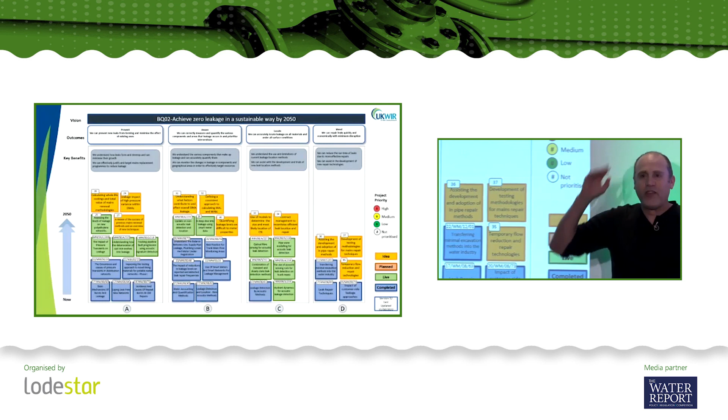So, number one is a very, very simple change. I'm just going to wander over here. Previously, all of these had a little number on them - you can see the top ones here, 36, 37 and such like - and you always said, what on earth do those numbers mean? It was just simply a placeholder number. What I've now done is put the report numbers down, so as soon as the report is published, it's there. It just makes it easier for everybody to find.

But the massive great big change that some of you are going, I can't believe you've done that, is that we have changed all of the outcomes going across the top. Everything is now badged under PALM - Prevent, Aware, Locate, and Mend. We coined that phrase about 5 or 6 years ago at this very conference, we started talking about PALM. PALM is now a way that the whole industry reflects upon managing leakage, and so what we've done is taken the route map and aligned it into that.

So everything falls under those categories, and it makes it a lot easier when we work our way through.

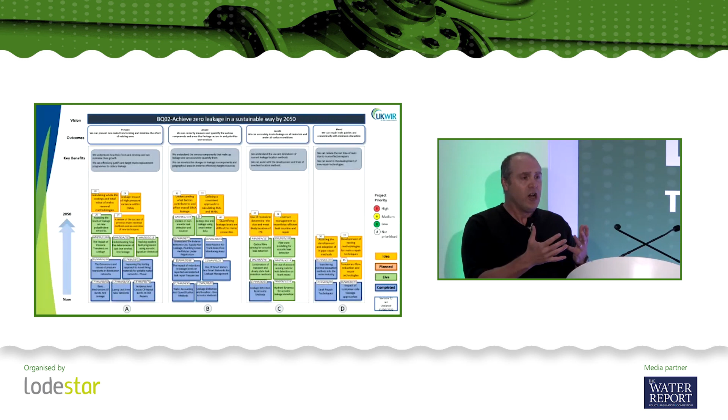The other great bit is I've made sure that all of the projects are on there. Previously, some of the projects were kind of put together, but I've made sure each project now is badged separately. For the first time, I can show how many projects we've done - there are 15 blue projects in there. That is a testament to you lot.

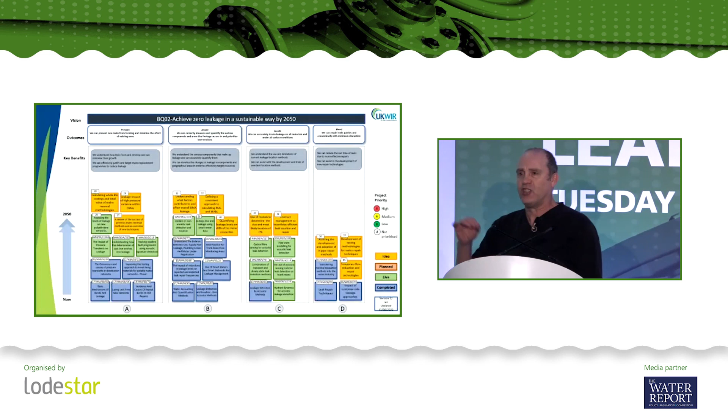Particularly to all of you in the water companies who are providing staff to sit on program steering groups and managing those projects, making sure the results reflect what we're looking at in the water industry. So I'd like to say thank you to every water company that is providing members of staff to sit on those program steering groups. It's extremely important.

We have done more projects than any other big question. When I showed this recently in front of all of the other program leads, they actually did do a gasp as well, because they were looking at our program and going, my word, you have done so much.

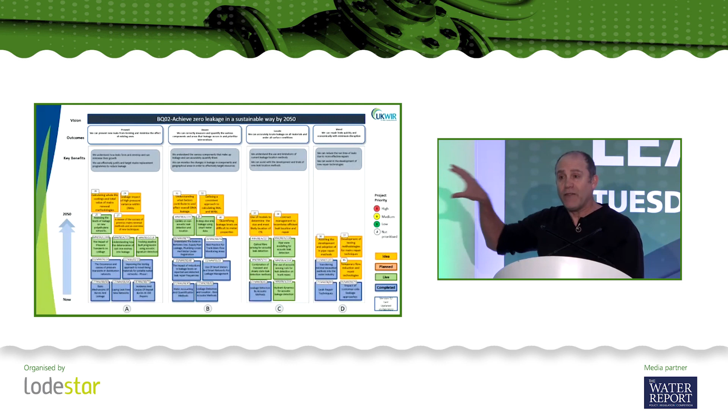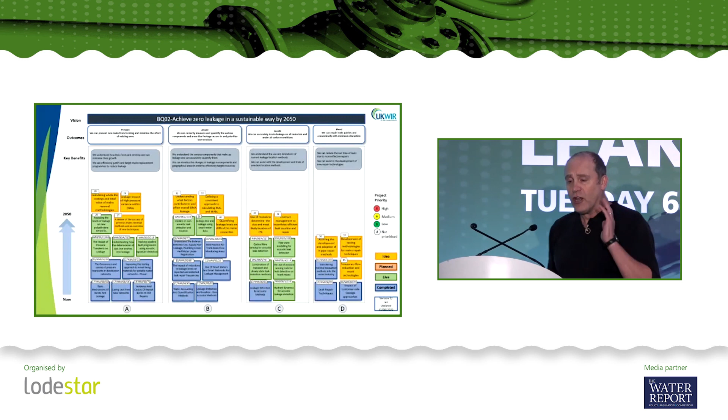But not only have we done so much, we are doing so much. We have 11 live projects running at the moment. A number of those are fundamental research with universities, and we're going to be hearing from Jen from Southampton, who's managing a lot of those. So there's a lot of work going on as well. What I'm going to quickly do is just dive through the live projects that we've got going on so that people are aware of what we're doing, and we'll work our way through in order.

So let's start with the prevent side over there. We have been really focusing, and it's really great seeing so many people coming into this room now who are looking at preventing leaks occurring in the first place. It's about calm networks, it's about our mains replacement programs, about all of those things.

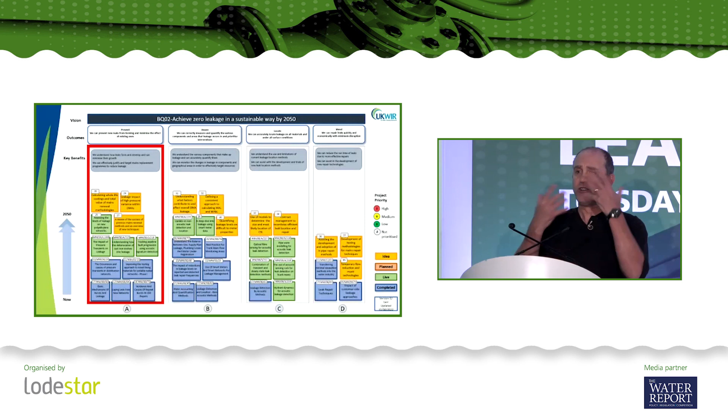So what we're looking at is we've got a couple of PhDs working at Sheffield University, looking at the impact of pressure transients. We did a great piece of work recently where effectively we looked at what causes pressure transients in our networks, able to demonstrate really well where those were coming from - 60% of our pressure transients were associated with pump changes, but 40% weren't. There's a large number of transients that aren't pumps going on and off in our network, caused by other reasons.

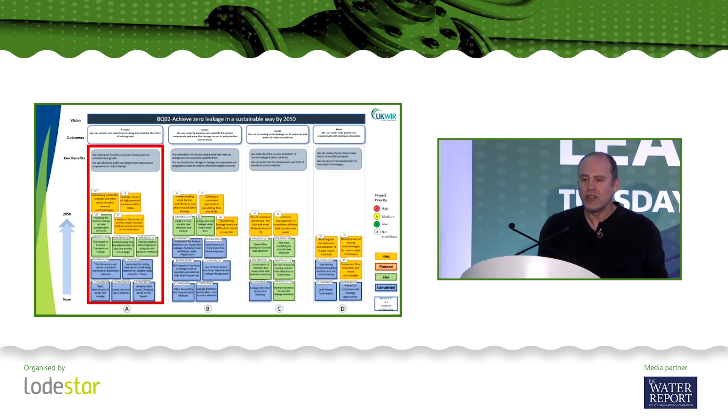Now what we're doing is taking that piece of work, handing that to a PhD and going, okay, what does that do to the pipes? What does it do when we've got the pipes flexing all the time with these pressure transients going on? And then a second piece of work there, looking at the deterioration of cast iron as well - looking at the stress risers that's causing and how, particularly with cast iron, that's affecting it and causing that long-term damage we're seeing, how leaks are growing. So that's going on at Sheffield at the moment, two great pieces of work there.

And then we got some ones from Southampton, tracking pipeline fault progression. I'm not going to talk about the Southampton ones because Jen is coming on video, so she's going to be talking about those bits.

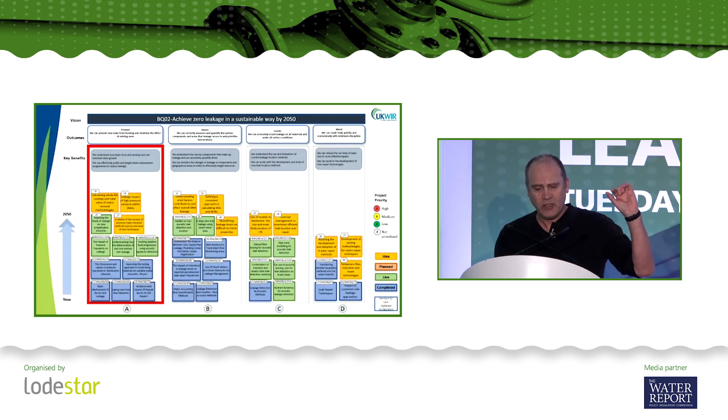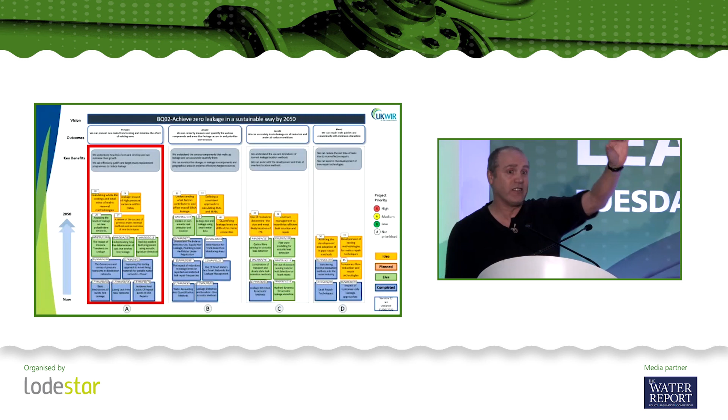So then we've got assessing levels of leakage on new polyethylene networks. Now we've already been talking about that today - in fact, I stuck a little post-it. I'm hoping everybody has written down some post-its, okay? Get your post-its up, put them up on the board there. But my one that I stuck up on there is, can we install new plastic pipe that doesn't leak?

I was in Germany about a month and a half ago, chatting with German water companies. And I asked them about leaks on new pipes, and they just went, what exactly do you mean? And it took some time to explain that I wanted to know how many times their new pipes leaked. And they basically had no understanding of that whatsoever because their pipes don't leak.

Ours do. We have good anecdotal evidence of that. John, I know you're in the room somewhere from Anglian Water, has really good evidence of that as well. What this study is doing is effectively going into brand new networks that are laid on brand new estates and saying, okay, let's assess the level of leakage on those new networks, because we need to understand the size of the problem. But this is one of those pieces of work that is a springboard, meaning the outputs from this will then start to drive changes.

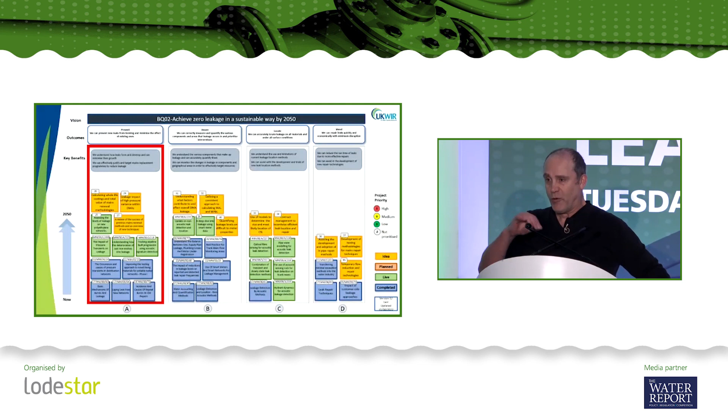Because we will need to make sure that our contractors, that all of our systems being laid on those new estates are laid correctly, but not just the new estates, every mains replacement as well. We can't be laying plastic that leaks. So that's a bit of springboard work we're doing at the moment. That's the prevent piece.

So pretty clear, I think, hopefully in terms of that side, but let's look at AWARE. Now, previously, when we talked about PALM, we thought of awareness as being which DMA are you going to go and work in today. I've expanded the scope of that a bit.

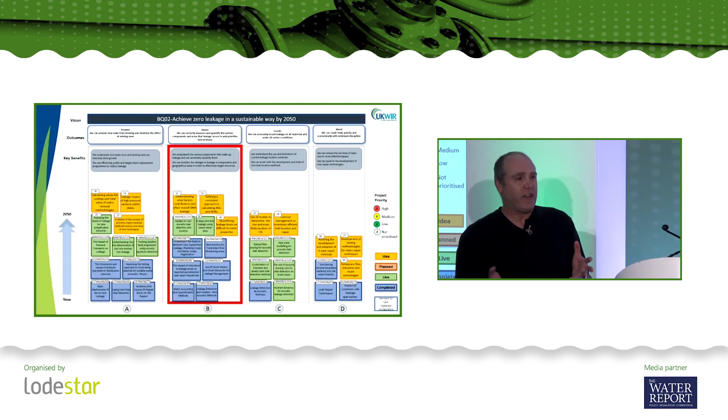Let me explain why. So I do like watching my YouTube videos. My son and I sit down in the evenings and have a cast-a-thon where we try to find funny videos to make the other person laugh. We almost inevitably come down to bike crashes at the end. But one of the videos I showed recently was Rowan Atkinson, who does a wonderful sketch playing Sir Marcus Browning, MP, giving an amazing speech that basically says absolutely nothing and just speaks in platitudes.

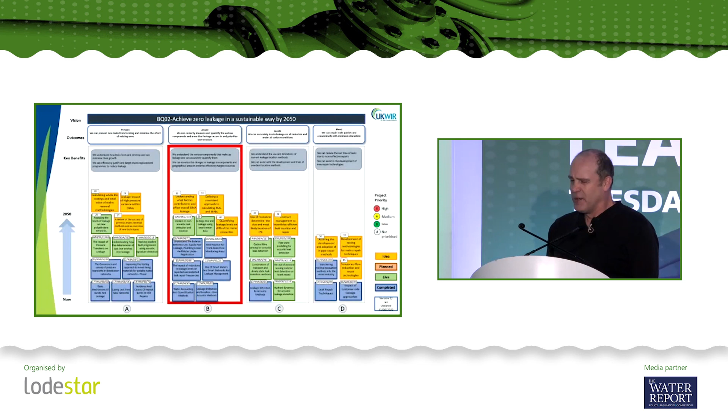But he finishes it with a great line, which for me summarizes leak awareness. Rowan Atkinson says, 'Because we don't want to be like the blind man in a dark room looking for a black cat that isn't really there.' That is leak awareness. We don't want to be in the dark looking for black cats that aren't actually there.

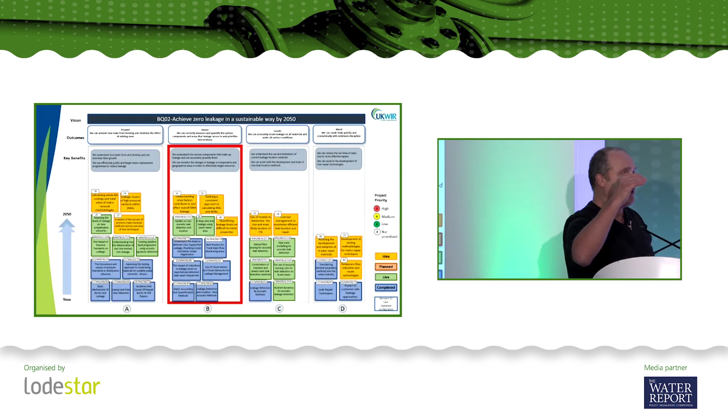It's not just about which DMA you're working in, it's also about which component of leakage: trunk main, distribution, supply side, plumbing losses. Where is our leakage occurring? You'll be hearing as we go through today a lot of work going on trying to do that quantification. Where is leakage happening? That's what fits into awareness. So think of awareness not just as geographically where, but where in the components of leakage. Because if we don't understand that, we are looking in dark rooms for black cats that may not be there.

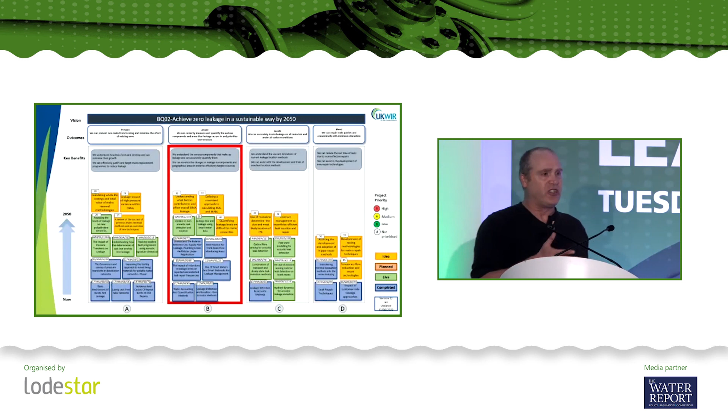So, projects we've got going on in that. We have an update on non-acoustic leak detection. We did a project about 6 years ago where we looked at leak detection techniques that weren't relying on acoustics. Really interesting, that discussion this morning about listening sticks. Totally agree. Part of the problem we've got is people saying there is no leak because I cannot hear it. But there are other ways of detecting leakage.

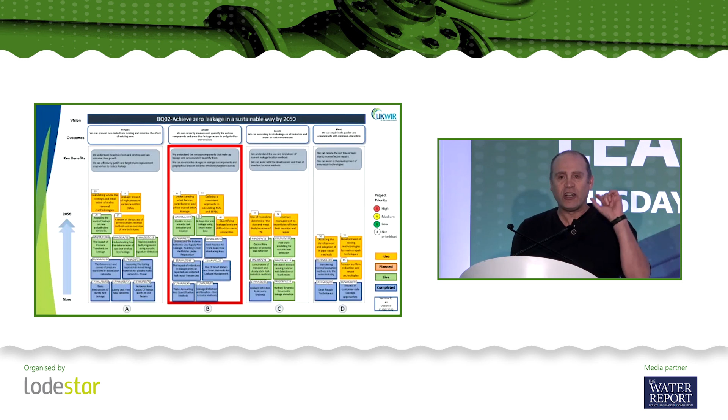Yep, I'm aware of my time, I know, I've got to keep going. Okay, other ways of detecting leakage, and we're dealing with those ones. So that's the non-acoustic leak detection update, looking at all the modern methods coming through.

And then the other one we've got in there is a deep dive into leakage, effectively looking at top down and bottom up and asking, can we reconcile the two? Now where we've got DMAs that have loads and loads of smart meters in there, can we start to do that water balance both ways?

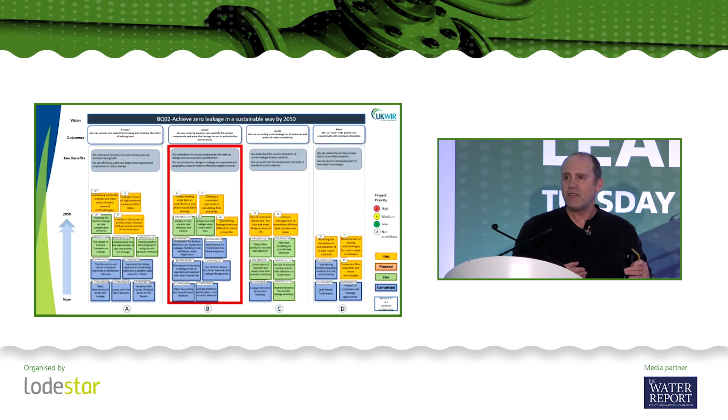So I've got Doug. Doug, are you in the room? Fantastic. Doug, can you just stand up? So Doug's working on that one.

Now, the reason I wanted Doug to stand up is because he's doing another important piece of work. We talk about collaboration. Three years ago, we asked you all to share your research plans and what you're working on in innovation and leakage, and every company stepped up and shared what they were doing. 328 projects shared across the industry. Fantastic, because that is collaboration. That's what we're doing really well, saying these are the projects we're working on. Doug is doing an update on that, coming out probably in the next 3 to 6 months, on the leakage innovation heat map. So that's the work going on at the moment.

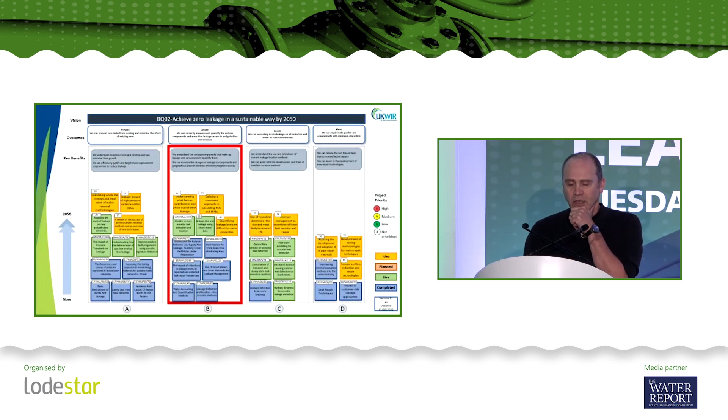The location stuff, Jen's going to talk about in a second, and MEND is an area we're slowly developing at the moment. You can see I've already started to get some projects in there. What I'm not going to talk about is all the ideas we're working on, but you'll start to see new projects coming through from UKWIR and also from suggestions, so we can build that plan up. What I'm going to do now is pause.

Thank you, Bob. And I'm going to pause now, and we're going to go over to video.

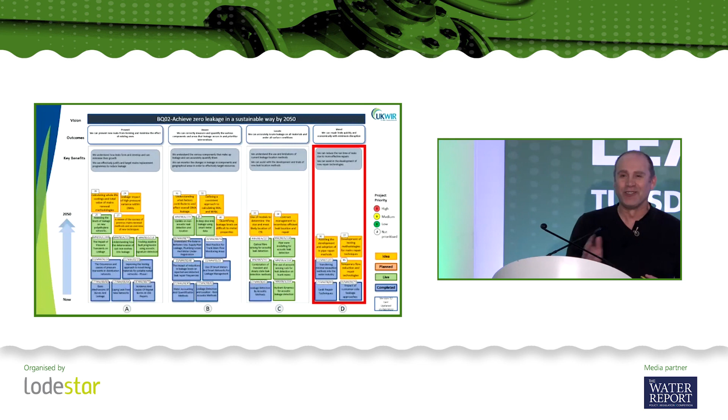My name is Dr. Jen Muggleton. I'm from the Institute of Sound and Vibration Research at the University of Southampton. I'm delighted to be here with you this morning to talk about some work we've been doing with UK water industry research on acoustic and vibrational methods for leak detection.

We've been working with UKWIR for a number of years on a range of projects. Last time I spoke to you earlier in the year, I talked about a project on leak noise characterization, a PhD project. This time I'm going to talk about 4 PhD projects that are all running at the moment, all in different stages of progression, and these are the ones highlighted in green on the slide.

Combining transient and steady state signal processing methods, which started in 2018 and is nearing completion now. Pipe wave modeling, which started in 2020 and we're about halfway through. Signal processing for distributed acoustic sensing, which started last year, so we're just 1 year in. And then leak to burst leak noise characterization, which started just a couple of months ago.

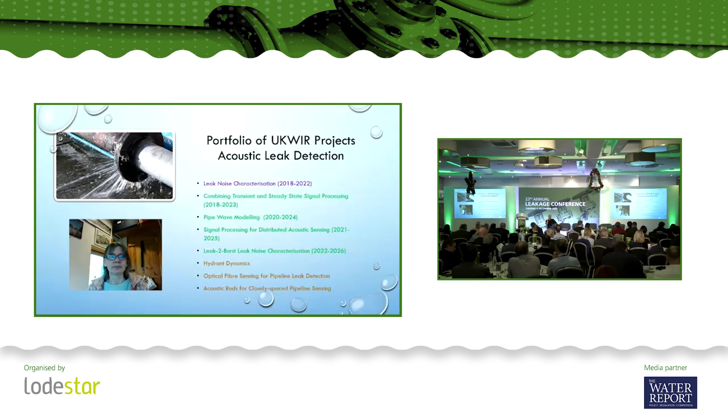Examination of the roles and potentials of steady state and transient methods, developing a framework for the simultaneous application of those methods, improving cross-correlation by directly estimating the wave speed, because we know that one of the limitations of the cross-correlation method is that quite often we don't know the wave speed accurately. And then looking at alternatives to cross-correlation time delay estimation suitable for transient signals.

Focusing on just 2 of those 4 elements, firstly, the direct estimation of wave speed. The student has investigated 2 potential methods: one is exploiting reflections using cepstrum analysis, which is a nonlinear analysis, and the other is using blind channel estimation, which is a statistical method for working out the propagation characteristics and hence the wave speed. He's done some numerical modelling, performed some experiments, and both methods look extremely promising.

The second is looking at alternative time delay estimation methods. He's looked at wavelet transform methods, data adaptive methods and differential methods, and again, all of those show some considerable promise. His thesis will be due out in the coming months, so I'd be very happy to share that once he has completed his Viva.

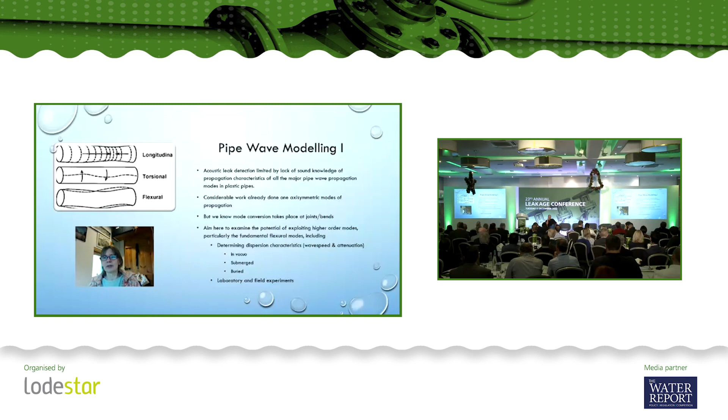So the aim here is to look at the potential of exploiting these higher order modes, particularly what we're calling the fundamental flexural mode, which is the simple bending wave in the pipe. We're looking to determine the dispersion characteristics, in other words the wave speed and attenuation, for a pipe in vacuo to begin with, because that's the simplest model, then submerged, then buried, and supporting that with laboratory and field experiments. So how are we progressing on this project?

As I mentioned at the beginning of this presentation, we're about halfway through the timeline. First of all, we've done some analytical modelling for an in vacuo pipe, both an empty pipe to begin with and then a fluid-filled, water-filled pipe. We've supported that with experimental measurements in the laboratory.

We're now starting to move on to submerged pipe. We have an analytical model for that, and what we find there is that the water outside the pipe effectively adds mass to the pipe, so the wave speed lowers again. The student is currently performing experiments in a tank at the university, and we'll have the results of those soon.

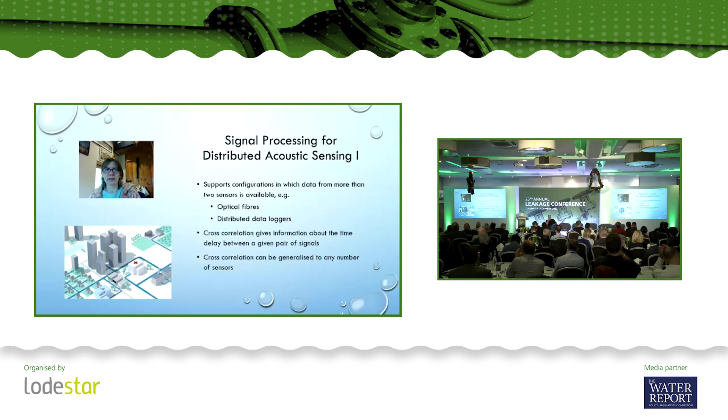Normally, when we do cross-correlation, we get information about time delay from just a single pair of signals, from two locations. But in fact, cross-correlation can be generalized to any number of sensors, and this is what we're looking at here.

As I said earlier, we're about 1 year into this project, which is a 3.5-year PhD program, which all our PhDs are these days. What the student has done is he's developed a multi-sensor matrix formulation for cross-correlation, where basically all the different possible pairs of sensors for a multiple sensor array are considered. He's looked at the effect of sensor spacing and regularity, the effects of background noise, the effects of multiple leaks and how that might manifest, and also what happens when you have reflections in the system.

To confirm what he's developed theoretically, he's in the process of developing some laboratory experiments.

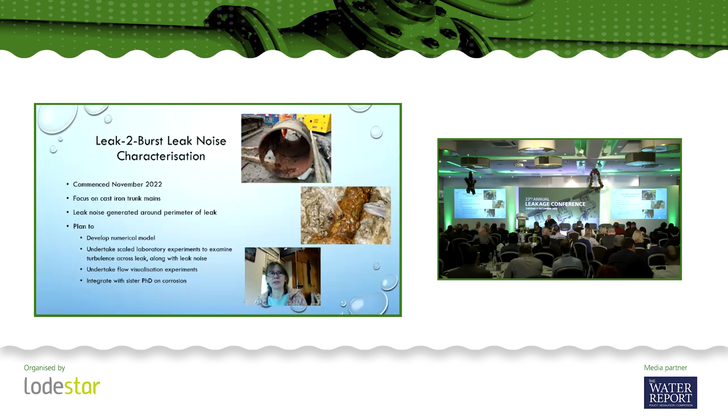Before I finish today, I'd like to draw your attention to 3 other PhD projects which we're now advertising to attract students to. The first is hydrant dynamics for acoustic leak detection. How can the dynamics of a hydrant, which is quite often where we do the acoustic sensing, the vibration sensing, affect what we pick up? And can we optimize sensor placing and orientation to get the best signal that we can?

The second is optical fiber sensing for pipeline leak detection, looking at how the acoustic vibration signal from the pipe might propagate through the soil to an adjacent optical fiber. What kind of offset can we tolerate? What kind of soil conditions and what kind of sensitivities are we likely to get?

And then finally, acoustic rods for closely spaced pipeline sensing. This is looking at inserting fine metal rods into the ground where one end touches the pipe and the other end comes to the ground surface, so that we have vibration coupling between the pipe and the ground surface, which would enable us to do more closely spaced monitoring than we currently can by only looking at hydrant locations.

Students must have a good undergraduate degree in engineering, maths or physics, but relevant industrial experience may count in lieu. All our projects are 3.5 years full-time or 7 years part-time. They're all advertised currently on findaphd.com and also jobs.ac.uk. If any of you out there are interested, do have a look. Just put my name, Muggleton, into the search box and all these projects will come up, or do feel free to contact me directly.

I'll just start off with why we need a National Leakage Research and Test Centre. I don't think I need to tell the people in this room the challenges we've got with leakage over the next 20 to 25 years. We've mentioned the innovation heat map a few times already, and the gap we see there on repair technologies and the potential that we need to do something in that area.

When I was initially talking to Clive about this a couple of years ago for an OFWAT bid, I was very much looking for potential solutions — where do we want to put some money where we can really develop some of this stuff? Clive kind of turned it on its head and said, rather than trying to pick something and put all our eggs into one basket, we need a facility where we can encourage innovators and creative people to come in and test new technologies and really speed up the innovation process. So that's the kind of angle we've looked at in terms of the current innovation journey.

At the moment, someone will have an idea and an innovator will test that within the garage or in the garden. They'll get it to a point where they believe they've got something worth following up on. At that point, they'll probably engage with a company, tends to be a local company or where they might have contacts, and they might be able to do some testing on one of the training rigs. A lot of companies have a small scale training rig now, so you could do some limited tests on that.

You might get it a little bit further, but before you can get it into the live network, you have to get the DWI Reg 31 approval. That can be a really long process, months or years until you're able to put it into the live network. And then at that point, you might get it in the network and suddenly it doesn't react how you expected, or it might come across other problems when you have customer supplies, valves, and everything else on there.

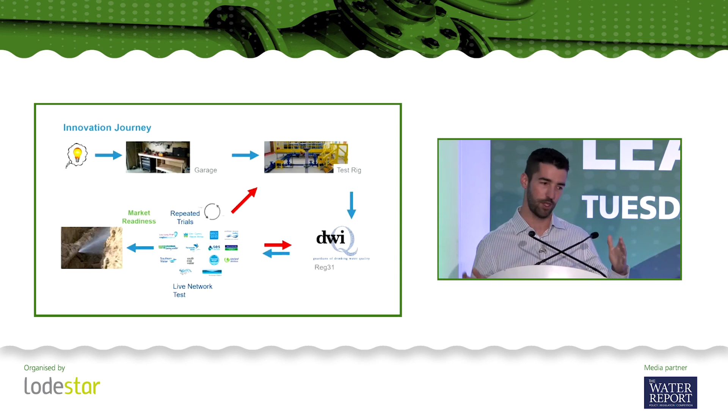So you might have to go around the circle again and develop further before you come back into the network. Then you get to the stage where you want to go out to the market, and every company will want to test it themselves, see how it works on their own network. So you've got to do that multiple times, and eventually, if it works, everyone's happy, it might go out to the market and be successful. But that could take a long time.

So the idea with the National Centre is that you're still going to get those good ideas, the development within the garage, and then at that point we're hoping they'll be able to come to the test centre to use the facilities while they're doing the Reg 31 approval. At some point we might even be able to get that testing, the Reg 31 approvals, through the test centre as well, so it's all linked in together. The idea is you're progressing these works together, developing, really understanding that the network's as close to real life as possible, so you're coming across those challenges within the development and solving them while you're getting your approvals.

And then once you know it works, you've had the involvement of the companies throughout that, so all the data is shared, everyone's involved in the tests we're doing and the results we get. So once you know it works, everyone has the confidence that this is something we can apply and get out in the market much quicker and get it adopted. We're really looking to increase the speed of that innovation. So these are the key objectives.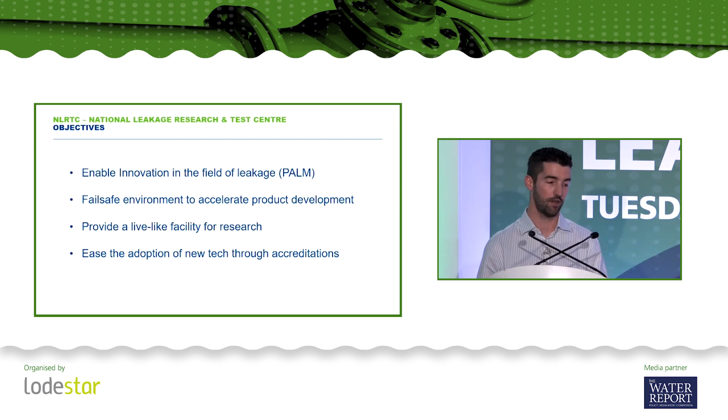It's really about enabling more innovation in the field of leakage, and we've got the PALM acronym there - it's not just about the repair side, it's across all elements. It's a fail-safe environment to really accelerate this development. We want to speed up, get more people in, get it moving quicker. We want it to be as close to real life as possible, because that's the idea - you can test it in this facility and then you've got the confidence to go into the live network straight away. And then hopefully, with the accreditation, whether that's the DWI approval or just that it's been through the test centre and gets that stamp of approval, hopefully it's going to give companies the confidence that it's ready to be used.

So there's a lot of companies involved. It's a big project - I think in total it's around £6 million bid, and I think £5.3 million of that is provided from the OFWAT fund. You can see we've got most of the water and sewage companies involved in this, so it's got really good backing around the industry. We've got the main research establishments on there - WRC, HR Wallingford and Isle Utilities - so they're helping support the design, the actual construction, and the running of the facility going forward.

We've got British Water involved, I think to really try and get the awareness to suppliers and get them involved as much as possible. And then we have the universities - we've got Southampton, just heard from Jen there, and then University of Sheffield, Joby Boxall, who you'll probably all be aware of from UKWIR projects and things in the past. So we've got a really, really good team behind it, and really good backing, which is great.

Now at this point, Clive was going to go through some of the features, so I'm not very familiar with the things we've got, but this is just a bit of an overview of the schematic and what our current thinking is on what's going to be at the facility. So we're looking at a network around 5 kilometres long, so quite a substantial amount of pipe work. We haven't decided on the site yet, but it'll be on a neutral kind of site where we can get good access for as many people as possible.

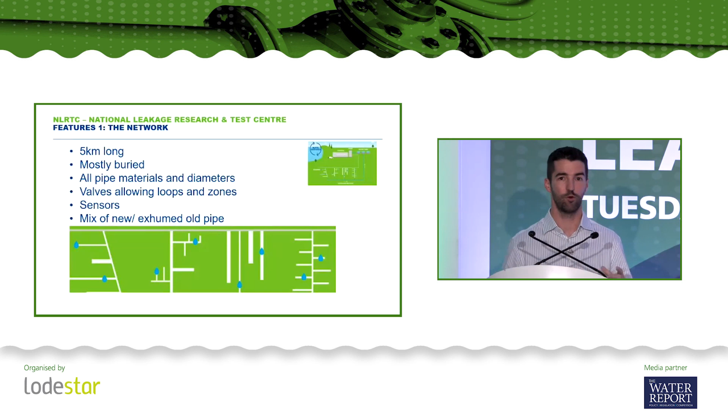There's going to be all kinds of valves, so we'll be able to rezone, isolate sections, and do lots of different tests. It's going to be highly sensorized, so we can collect the data, monitor what's happening, and really understand every data point on that network.

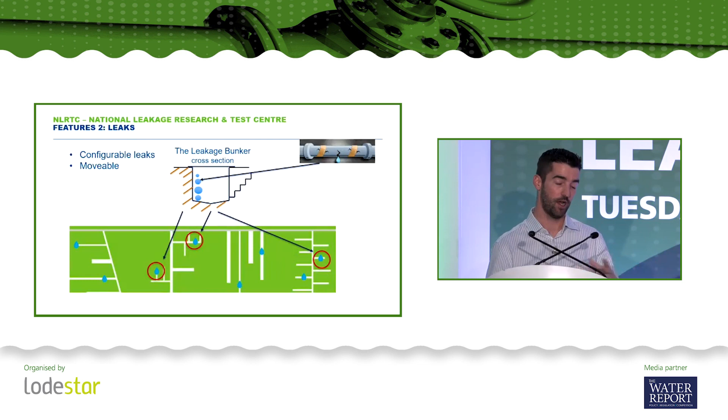The next key feature is about having configurable leaks. The idea is that we can define where leaks are and what leaks are running at different times in different parts. If a supplier comes in and you don't want them to have the same leak in the same place, it's not going to really test anything, is it? So we want to be able to move those around, and we don't want them to know where they are, so we can really test that and run lots of different scenarios.

And it's got to be water efficient. We can't just have this water leaking away and disappearing. So it's all self-contained. All the leaks that are generated are collected, the water's collected, recycled, and sent back through the facility. Nothing's wasted, it's not leaking away.

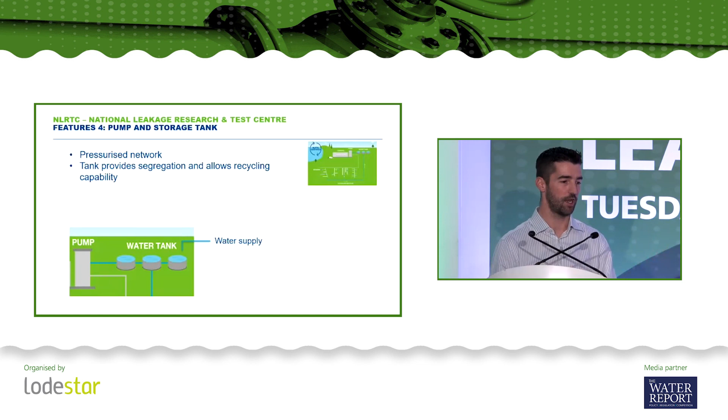We're going to have some water storage on site, and the idea is that it's going to be isolated from the live network so that we don't get any backfeed into the live system. So it's a completely isolated system, which is going to be pumped to make sure we get network pressures representative of the live network.

There's going to be a control room on site. The idea is that there'll be, at the moment, 3 full-time staff planned. There'll be a centre manager involved in organising who's in and when, and what's going to be the priority for which projects we're doing at each time. There's going to be a researcher, maybe a PhD student, working on site. And then there's going to be a technician as well for doing the valve and the actual operation of the network.

I think that's going to be from opening, we've got that for a set period of time as part of the project. There's longer term decisions to be made about how it's going to be run in the longer term future.

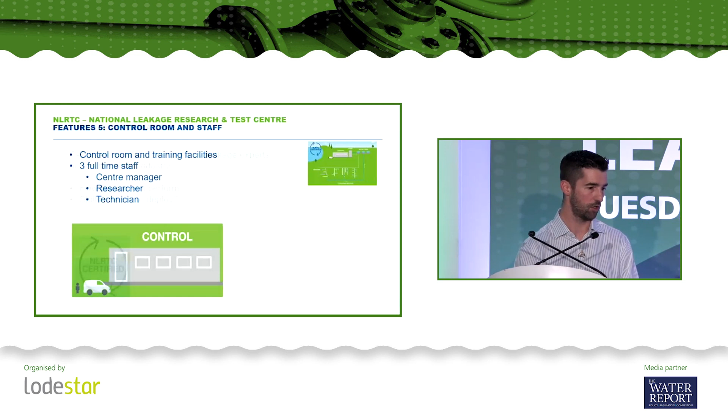So I mentioned before, we're hoping to have some certification involved in this, so you want that stamp of approval - it's been through the test centre, we've all signed up to it, we've agreed this works now, and we've got the confidence for them to take it out into the industry. There's been talk about whether we could use it as a training centre as well for the different technologies, but the focus is very much on promoting innovation and trying to get that to progress as quickly as possible.

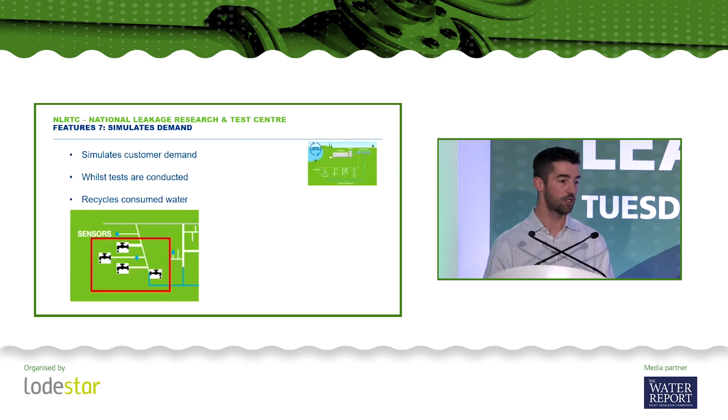Finally, we're also wanting to try and include some customer demands. The team at Sheffield are going to look at some algorithms for generating a demand profile, so we are really trying to represent what's happening on the network day in, day out. These technologies are really having to work hard to deliver against those challenging conditions, so what's the impact on customer supply pipes and things like that. And again, the water from that's going to get recycled back through the system, so nothing will be lost.

In terms of a delivery plan, we're in the very early days at the moment. The first 2 workshops have happened on the operating model and the governance - getting that important, if not quite as exciting, stuff out of the way early on - but we're definitely entering the phase now where we really want to encourage involvement from as many people in this room as possible. We'll be doing more of the specifications, getting into detail of what size pipes, what materials, how it's going to work, all that kind of stuff, which I think everyone will be really keen to get involved in, and we really would encourage everybody to get involved.

Okay, so we've got a multi-speaker session now, just to bring us up to lunch for the next hour or so. This is around the topic of pipes and innovation in that area, which, as we heard earlier, is a key area we need to evolve and develop in. Firstly, on Designer Liners, we've got Katrina Flavell, who is a technical specialist on clean water networks, asset strategy and policy at Yorkshire Water, and then Joe Sanders, who has a much more efficient job title of Technical Director of RPS. So Katrina and Joe to kick things off on Designer Liners, another OFWAT Innovation Fund winner.

Then Ian Robinson is going to talk to us about in-situ resin lining. He's a director of Robinson and a consultant with Resin Line. And then we've got a third paper from Leo Fern, who is head of leakage strategy and projects at Hydrosave, on innovation in MEND, targeted low-dig background leakage repair, another really key area. So could all the speakers for this session come and join me here on the stage, and then you can be almost continuous.

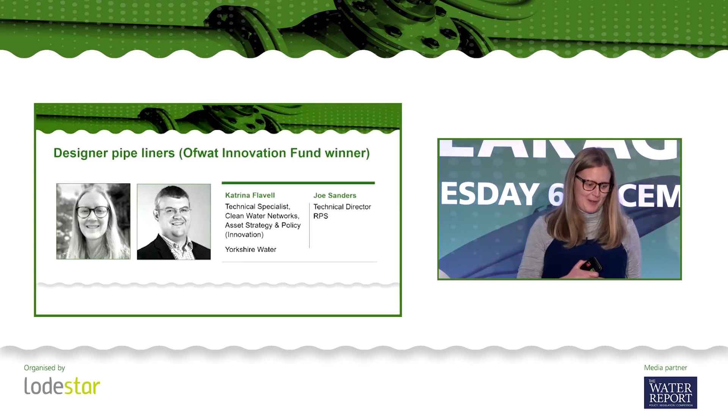They say start them young, but I'm perhaps taking it to the extreme today, so we'll indoctrinate this little one into the world of leakage. It's my last week before maternity leave, so it's nice to go out on a high. So I'm Katrina Flavell, I'm from the innovation team at Yorkshire Water. I look after our projects within the Clean Water Network. My background is as a materials scientist, as is Joe's, and that perhaps explains a little bit why we're so passionate about this project that I'm presenting to you today.

So I'm going to have a chat to you about Designer Liner. I'm going to walk you through some of the history of the project. Joe's going to talk a bit about phase 2 and how we're going to deliver that, hopefully, if we're successful in winning a bid. And then there's an opportunity at the end to get involved, because as we've seen so much today, it's all about the collaboration that makes this work really, really well.

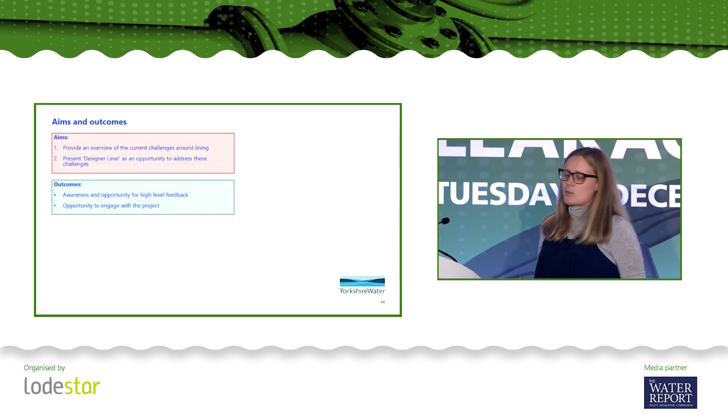So what I hope to get out of today is to provide you with a current overview of the challenges around lining. I think quite a few of you will be familiar with this, but if you're not, it's a good introduction. I want to present Designer Liner as an opportunity to address these challenges. There's always the opportunity for high-level feedback, so please do ask questions at the end of the session and have a chat with us over lunch. The team is here. And then finally, the opportunity to engage with the project.

So what's the problem with current lining, and where are the opportunities? If you're a lining manufacturer in the room, I'm not here to knock what you're doing - what you're doing is great. We have some fantastic lining solutions available that do wonderful things, and you operate in a really difficult market in the UK. But we probably need to move beyond where we are, because we do have some challenges, and the OFWAT Innovation Fund potentially offers a good opportunity for that.

So if we think about regulation, we've talked a lot today about how highly regulated the UK market is. That's really good for our customers in some respects. We want high quality drinking water, assets with a nice long lifespan, and good value for money. But if you are a supplier in the lining market, that's really hard, and it makes the UK quite an unattractive market to enter. We've had conversations with the DWI and OFWAT about this challenge, but we feel as an industry we perhaps need to do a little bit more to support that. I'll come back to cost.

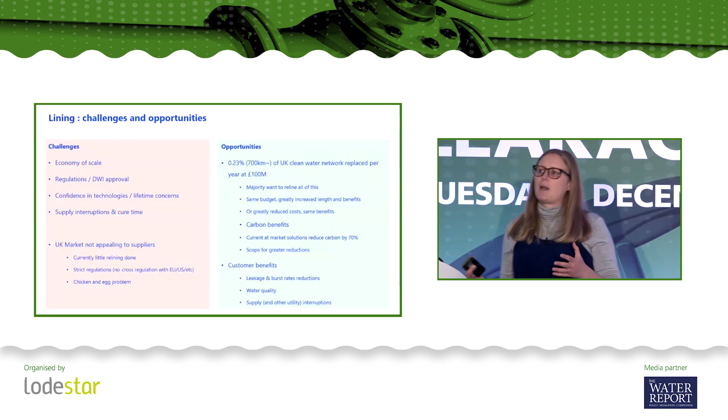I've spoken about Regulation 31 approval. We've got some lifetime concerns about lining technologies that we have. Some of these products, we're told by suppliers, have fantastic lifespans, and it's the lifespan of the material that will pay back for your asset rehabilitation. But if the warranty is only 5 years, that makes us a bit suspicious. How can we push that warranty forwards? And how can we support a testing regime as an industry to give more confidence in lifespan?

We then have the ever-present challenge of supply interruptions and cure time. Do we need to engage more with the regulator to talk about how we address that challenge? If we find an amazing lining solution, but it takes 5 hours to install and cure, should we be pushing back against that 3-hour interruptions window?

And I've talked quite a bit about the UK market not being particularly appealing to suppliers. There's an amazing opportunity in lining though. We used to do loads of lining well before I was in the water industry, and we've kind of lost that momentum, and we need to be thinking about doing a bit more of it. We're replacing a fraction of our network - you know that, it's not enough. When we've been out to water companies and spoken to them, a majority want to do so much more lining. You can either do the same budget and do more of it, or reduce your costs and have the same benefits. But we have to sort of stimulate this market.

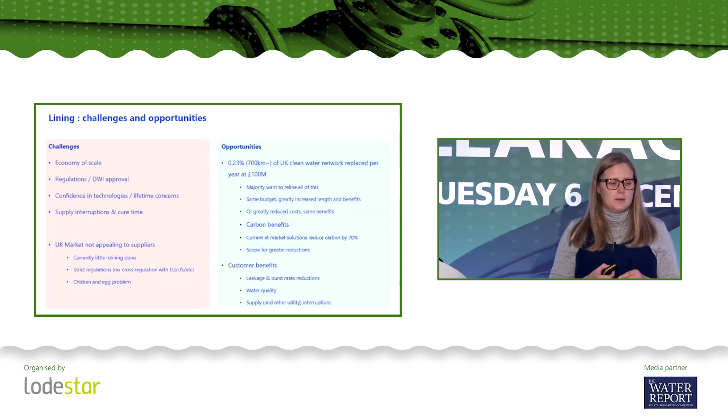There's obviously carbon benefits that we think we can quantify quite well. Current at-market solutions, we think, reduce carbon by about 70%, with scope for greater reductions as well. We always have to think about the customer - it's why we're here. Big leakage and burst rate reductions, fantastic water quality improvements, and we can potentially reduce other interruptions to supply as well. So there's some fantastic challenges and opportunities to really invigorate the lining market.

Designer Liner is a project that's evolved through a couple of stages. If we think about the 20th century, old pipes, dig a hole, perhaps do a bit of lining for water quality. We then had an UKWIR project in 2021 looking at improving the testing approach for lining materials for potable networks. That was about saying, can we improve things? Do things need to improve? The answer was yes. What our testing and approach at the moment isn't great.

That really inspired us for phase 1 of Designer Liner, which won £200,000 from the OFWAT Innovation Fund last year. We've delivered that work with RPS with some support from ISLE. It was about saying, what do we need from a new lining solution and how can we bring it to market? Not developing a product, just defining a specification, looking at the scale of the market, understanding the challenges.

We identified that we really need a product with a lifespan of at least 100 years, because that's where the economic payback is. We've also started thinking about other exciting things you could bring to that lining material, like self-healing materials, embedded fibre, smart networks, biofilm suppression, sensing - all of these fantastic things. That project is just drawing to a close, and Joe will chat a little about that.

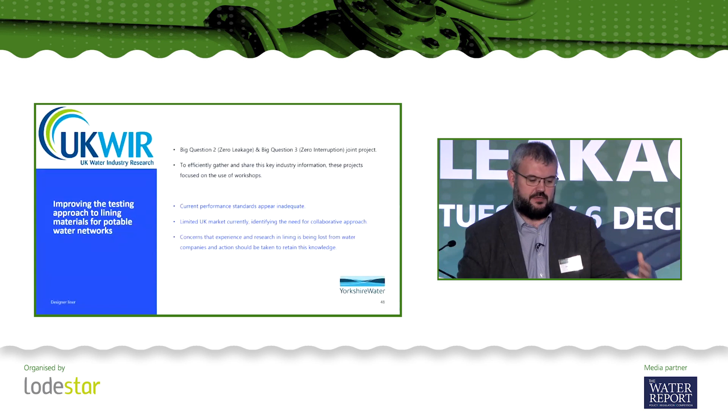Mains renewal rates are pretty low, lining rates are even lower. However, people are saying, if we could do lining cheaply, we would do more and more of it because we can see the benefits. We just can't make the business case because of things like the 3-hour interruptions - these things just don't cure quick enough. Or if you've got a tubular liner, that potentially means you've got to go and cut out all the supply pipes, so that makes it not cost effective because you've got to dig down all of those. We might as well put a big pipe in anyway, proper full polyethylene pipe. So there's lots of things around that.

And again, the supply chain, the water companies, all of them wanted to share and bring that data together. And so that got us thinking, well, where do we take this next?

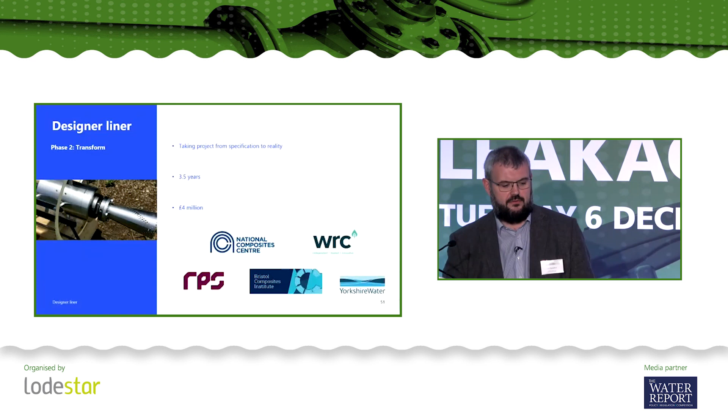So what are we expecting in phase 2? As I said, a 3.5 year project. We're just getting the partner support sorted out now before Christmas, and we'll put the phase 2 bid in just after Christmas. As a well-behaved catalyst piece, we were able to skip the first part of the transformational stream submission, so we've gone straight into the second phase, which is fantastic - a really good innovation from OFWAT, moving forward with 'well, actually, you've already done part of it, you've already done your phase 1, so go straight through to phase 2.'

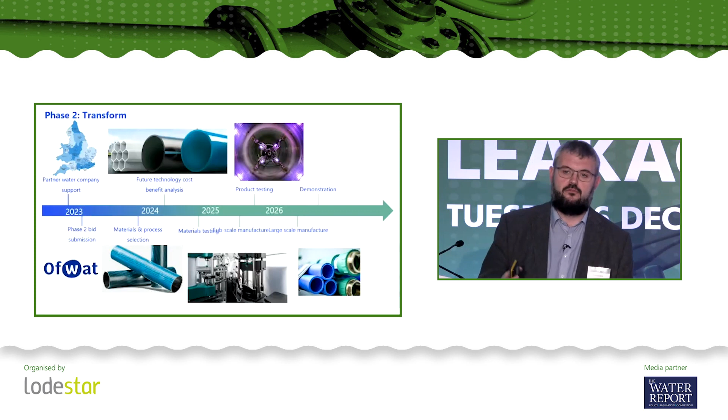We're then going to go through these future technology views. Do we want suppression of transients? Do we want biofilm suppression? Do we want fibers in the lining? Do we want structural reinforcement within the lining? Do we want the lining not to be made of oil, which is a key one? This thing has to be sustainable. This is the 21st century liner, not the 20th century liner just rolling over into the 21st century. It has to be massively future-proof - so again, does it have to be oil-based?

This is the stuff where the guys at Bristol are going, 'oh, well, we could synthesize it here and synthesize it there.' We had a chat yesterday morning - it almost made us miss all of our trains to get here - but in the end we said, yeah, okay, this is the sort of thing we need to go to.

Once we've selected those materials and all the added features, we need to put it together - literally molecules being broken apart and put back together, as I said. We then need to do materials testing.

This is at a much lower scale, almost painting it onto old bits of pipe, pulling it to pieces. Does it bond to the pipe? Does it not bond to the pipe? Lots of different tests - and for those of you aware of lining, is it meant to bond to the pipe, or not meant to bond to the pipe? Is it fully structural, or non-fully structural? All of these things will be there.

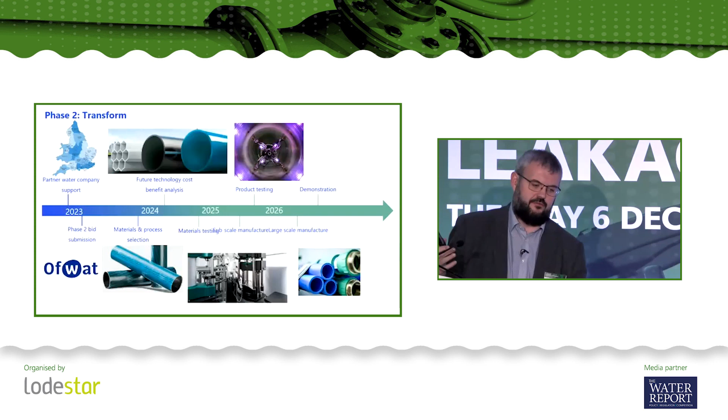Then we're going to build bigger tests to make sure it all works at that bigger scale, and also demonstrate that this can be put through in an easy way, cured in an easy way, and meet all the requirements. So that's phase 2. I'm going to hand back to Katrina now for the final bit of how to get involved.

As I've said, we were delighted with the support for phase 1 - if you're a water company supporting that, thank you very much. Phase 2 is clearly a lot more ambitious, both in cost, duration and scale. If you'd like to support this project, I would really like to hear from you, as would Joe.

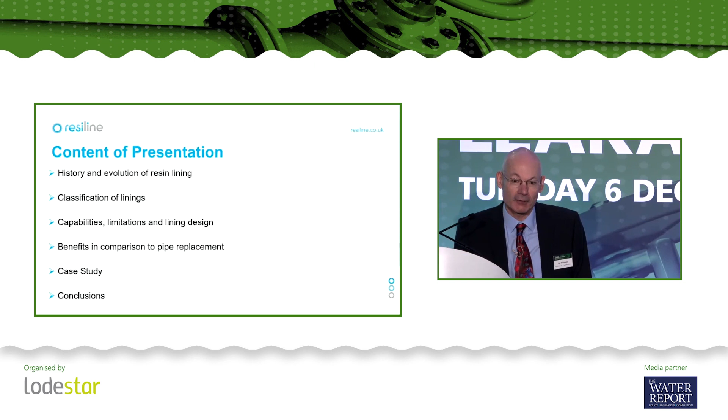I'll skip through briefly what I'm going to talk about. I'm going to do a very brief history of resin lining, where we've come from and up to where we are now. Katrina and Joe have already talked about where we might be going to some degree. I'm going to talk a little bit about classification of linings from a structural perspective, some of the capabilities and limitations of spray lining, and touch on aspects of lining design in terms of lining installation and designing them for lining schemes. Quickly through some benefits in comparison to pipe replacement, and I'm going to wrap up with a brief case study from Yorkshire Water and some conclusions.

So what is in situ resin lining? Basically, it's the application of a two-part thermosetting polymer, which can be epoxy resin, polyurethane or polyurea, to the internal surface of an existing pipeline infrastructure. The polymer is applied as a liquid via what we call the spin cast technique, and it hardens at the ambient temperature of the pipeline, so generally there's no external heat source required. The actual setting time of the material will be determined inherently by the polymer type, but also by product specific formulation characteristics.

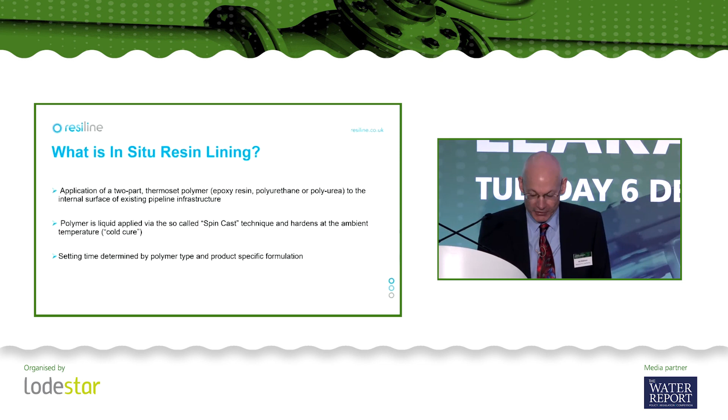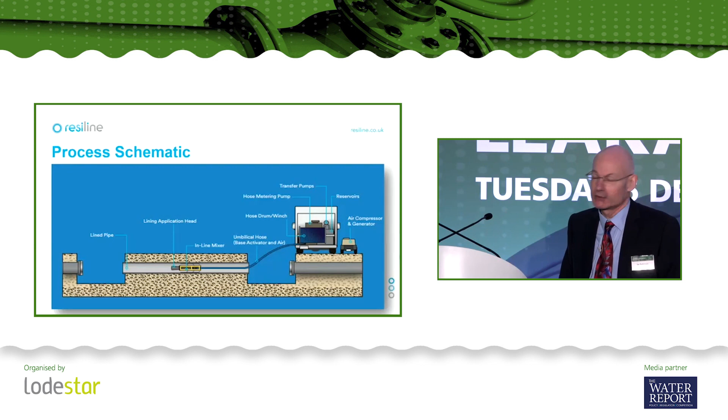So the umbilical is connected to a static inline mixer. The two components travel down their individual hoses in the umbilical, are brought together through the static mixer, fed into the lining application head, which is powered by compressed air. The application head rotates at typically 8 to 10,000 RPM and sprays the polymer onto the inside of the pipe. And that's all happening as the lining head is being winched back through the pipe towards the lining rig.

So if we look at the history of lining in the UK, I probably suspect there's no one in the room old enough to remember the early efforts with lining pipes with epoxy resin back in the 1980s. Does anybody remember dear old Mercol Geopox, which was the first epoxy used in potable water mains?

But by the end of the 1980s, when we entered AMP1 in the 1990s, the use of epoxy resin for lining potable water mains had become very popular. Through the AMP1 and AMP2 periods, there were some pretty substantial lining programmes undertaken. Thames Water did an awful lot of epoxy lining, as did Yorkshire Water. So it really became the preferred method for rehabilitating pipes which were suffering from or exhibiting water quality compliance issues.

So of course, in the wake of privatisation and the advent of the European Drinking Water Directive, a lot of work was required to bring drinking water up to the standards of the day. So an awful lot of epoxy resin lining was carried out during the 1990s.

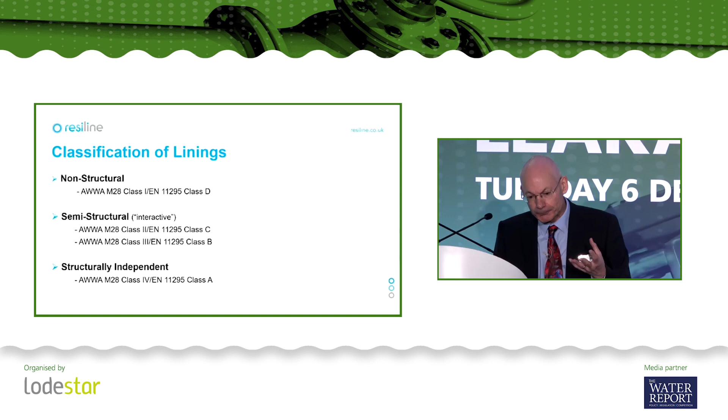Now, there are two classes of semi-structural liners, class 2 and class 3. The simple difference between the two being that a class 2 liner relies on adhesion to the host pipe, whereas a Class 3 liner doesn't require adhesion - it's got sufficient hoop stiffness to be self-supporting in the absence of adhesion.

And then finally, we have structurally independent liners, which some people refer to as fully structural, which are the Class 4 per AWWA M28, or Class A if you prefer the BSEN ISO classification.

So, what are the capabilities of resin lining? Well, first and foremost, it enables the restoration or enhancement of hydraulic capacity. That was very evident in days gone by with water quality driven programs, where mains remained heavily tuberculated and there's a loss of hydraulic capacity. If it's cleaned and spray lined with a smooth polymeric liner, the hydraulic capacity is restored or enhanced.

I've already touched on maintaining water quality compliance. Generally that's things like discoloration or iron and manganese levels. It's generally assumed, and experience tends to bear this out, that once a main has been spray lined, internal corrosion is effectively arrested. Obviously you can't do anything about external corrosion, which can continue apace in some circumstances. So those aspects really apply to linings generally.

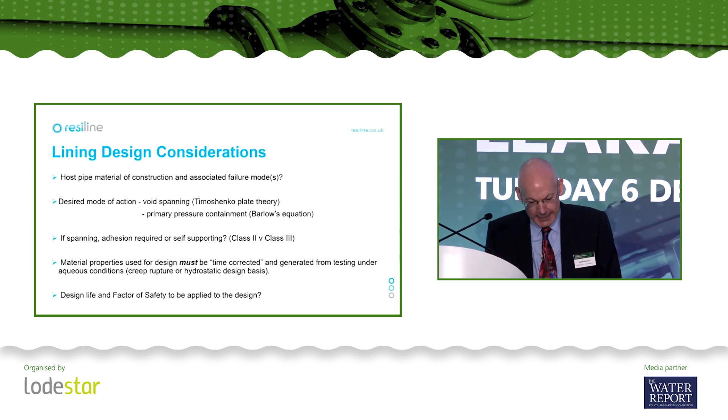If we're designing for spanning, does the lining need to adhere to the host, or can it be self-supporting? I'll come on to one very important point - Joe and Katrina have already alluded to material properties and lifetime of a liner. In designing a liner thickness for a particular scheme, it's absolutely imperative that the material properties used for the basis of the design are time corrected.

I've seen some examples of extremely dubious practice, not in this country I hasten to add, where suppliers of materials are quoting dry material properties, short-term properties, so no allowance for long-term immersion in water, no allowance for creep, and are simply applying arbitrary correction factors to short-term dry properties. It's just fundamentally bad science.

So if anyone's considering using a lining material, ask the supplier to provide you with their time-corrected data. And finally, what design life, which again Joe and Katrina have alluded to, should be applied to the design? Is it 30 years? Is it 50 years? Is it 100 years? And what factor of safety might you want to apply?

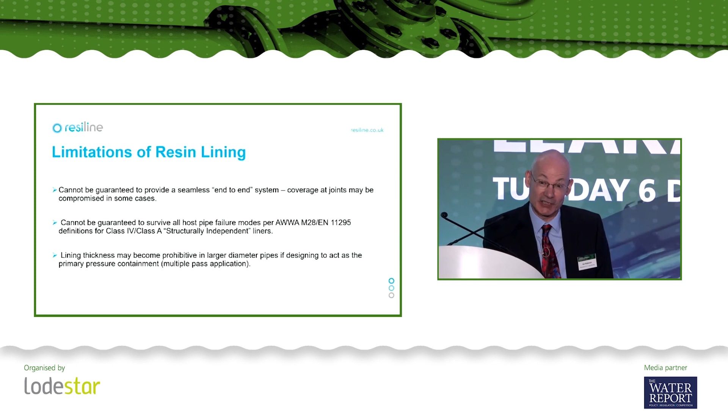Okay, so that's everything that's good about resin lining. So what about some of its limitations? Well, the first thing is that resin lining cannot be guaranteed to provide a completely seamless end-to-end solution. It may or may not survive catastrophic failure of the host pipe. And the lining thickness required could become prohibitive in larger diameter pipes, especially if you're looking at designing the lining to act as the primary pressure containment.

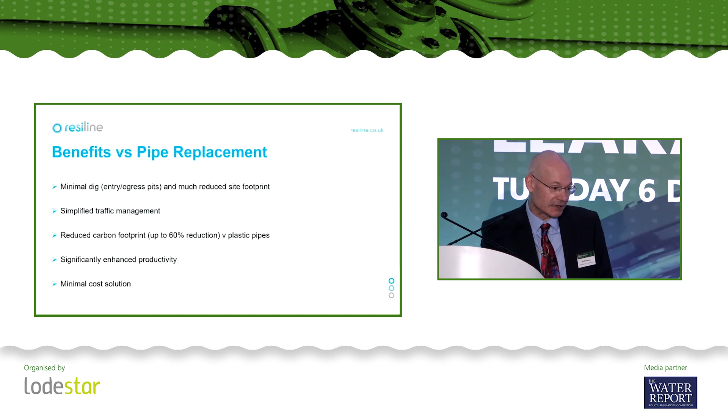Okay, now some of the benefits of lining against pipe replacement - fairly obviously, there's much less digging required. If you've got less holes, you're on site for a shorter period of time. There's going to be less in the way of traffic management to deal with. Significantly reduced carbon footprint, possibly up to as much as 60% reduction compared to plastic pipes. Greatly increased productivity and lower costs compared to replacement.

Now, are there some barriers to adoption? Yes. A lined pipe will be a rehabilitated pipe, it's not a new pipe. The 3-hour service interruption metric, that is a barrier to lining. If the main's heavily tuberculated, it's very difficult to clean a main, line it, disinfect it, flush it, and return it to service in 3 hours. There may be some inherent resistance to lining within a utility.

It might be that, well, we've always just replaced pipes, and so that's what we're always going to do. And the issue of knowledge and experience lost from the industry - a lot of the people that I've known over the years who know and understand lining have either retired or sadly are no longer with us.

So finally, just to wrap up, let's go onto a very recent case study from Yorkshire Water, working in partnership with Morrison Water Services and Resiline, the company who provide the lining material. This involved 10 kilometres of distribution mains, quite widely scattered through South and West Yorkshire, from Tadcaster in the north down to Sheffield in the south.

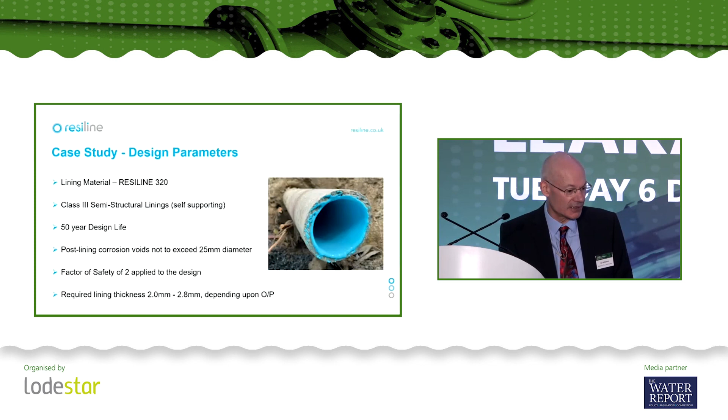Typical distribution mains, 3 inches to 6 inches diameter, fairly standard operating pressures. The material used was Resiline 320. These linings were all designed to be class 3 semi-structural linings, so self-supporting and not reliant on adhesion. All designed with a 50-year design life, assuming any corrosion voids forming post-lining, as a result of ongoing external corrosion, would not exceed 25 millimetres diameter. A factor of safety of 2 was applied to the design, which resulted in lining thicknesses ranging from 2 to 2.8 millimetres, all applied in a single pass of the lining head.

According to Morrison Water Services, the benefits accrued in comparison to replacement included a very significant reduction in time spent on site, a meaningful reduction in carbon, and a good reduction in cost. Because of the geographically dispersed locations involved, from a cost perspective, I'm pretty sure that scheme wouldn't have been as cost effective as other schemes with a much higher concentration of mains in a smaller geographical area, but still a meaningful reduction in cost. And finally, an enhanced customer experience compared to replacement.

So to wrap up, resin lining has come a long way in the last 40 years. There is currently a new material available which offers interesting and appropriately validated structural properties. Spray lining can provide fit-for-purpose outcomes, albeit it doesn't provide a new pipe, but there are significant societal, environmental and economic benefits in comparison to replacement. Going forward, I would suggest there is some process development needed so that lining can provide a totally seamless end-to-end solution, not potentially disrupted at joints in the pipeline which has been rehabilitated.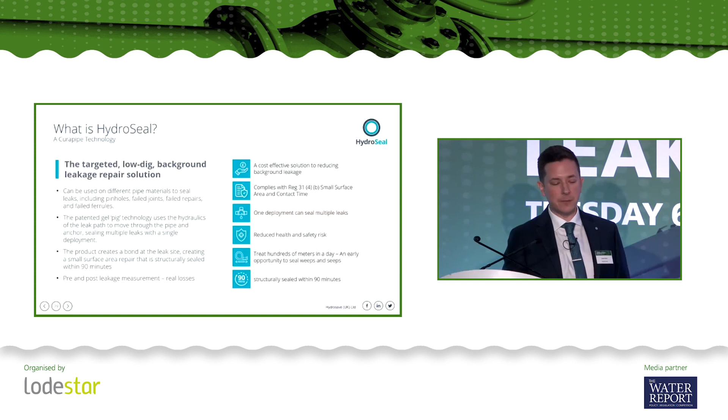The benefits of this type of method: we believe it's a cost-effective solution to reducing background leakage. It complies with Reg 31(4)B, small surface area. In one deployment, you can seal multiple leaks. We believe there's a reduced health and safety risk compared with traditional excavation methods, and you can treat hundreds of metres in a single day, giving us an early opportunity as an industry to seal weeps and seeps before they become worse. After deployment through the pipe, it is structurally sealed within 90 minutes.

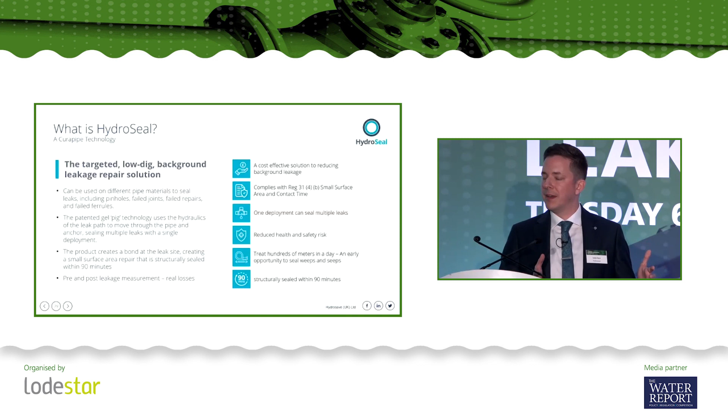One of the other benefits for this is that the deployment process itself allows you to monitor how much leakage you've got on a section of pipe before you've put it in, and you can see through the flow monitoring and the pressure monitoring, you can see actually what you've fixed during the deployment.

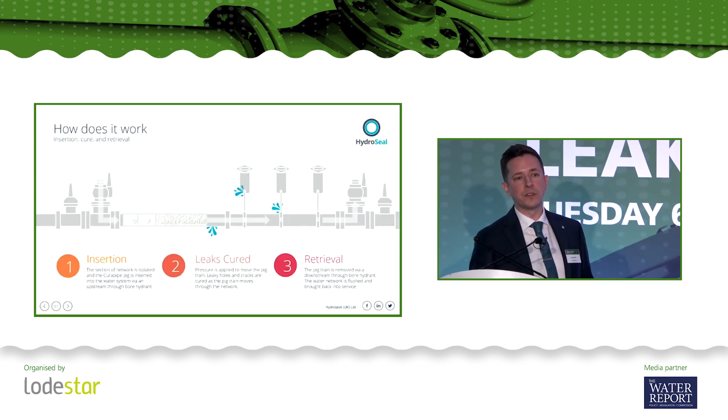So we launch upstream. In a DN 100 or 4-inch, we launch at 2,500 litres per hour plus 500 litres an hour to create a pressure differential and flow through the pipe. Ultimately, it propels the pig train - a 3-part pig train with the secret sauce at the front, the active repair material, fibres or chips. So that's enough of me talking.

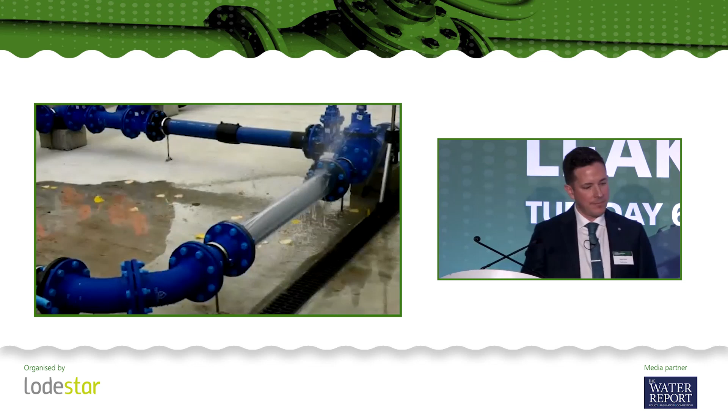What does it look like? Welcome to Trent Valley, our rig just 30 miles north of here. You can see there a see-through section of pipe with a leak on the side closest to the bottom of the screen. There we can see the front of the pig train moving through that section of pipe, curing the leak as it goes.

That's the carrier fluid with the active repair material, what I like to call the secret sauce. These ones are the fibres, not the chips, but if we've got a particularly persistent section of pipe, we can put the chips through as well. There's a video of those on the stand outside.

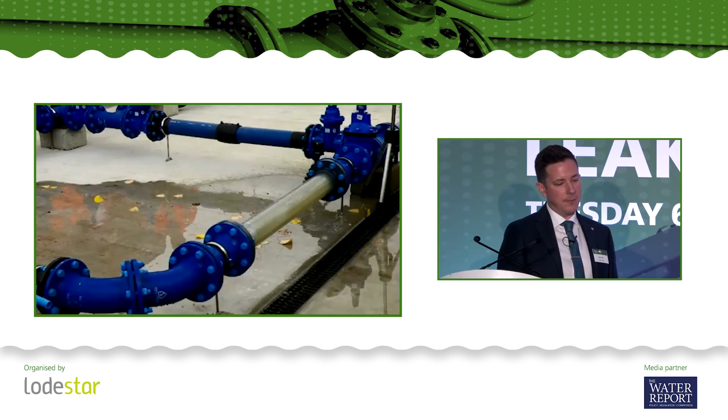The video will speed up in a second and we'll see the first of the 2 propulsion pigs. The first one, a low viscosity gel pig, and then behind it, the second pig, a high viscosity gel pig. In the real world, we would flush afterwards 4 times pipe volume, or 8,000 litres an hour.

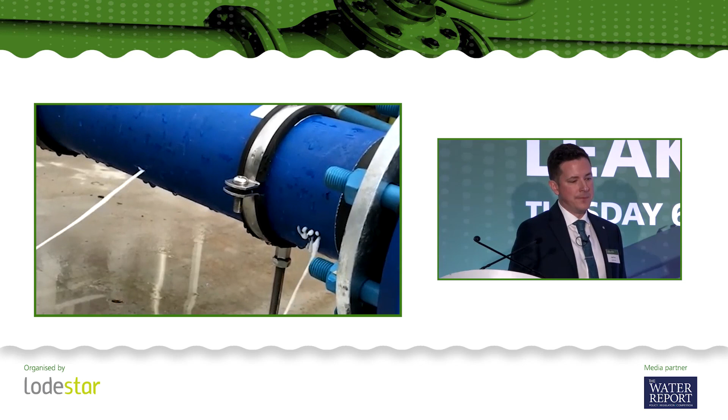Great. So here we have a collection of pinhole leaks and a split. We can see the carrier fluid going through and curing those leaks as it passes. I thought at a leakage conference we should have some videos of leaks running, just to remind ourselves.

This is my least favourite video, showing a very slow seal of a joint leak. But again, a benefit of the technology - it gives you that early opportunity to seal weeps and seeps before any leaks get worse, and indeed many of them in one go. We can see the leak getting fully sealed.

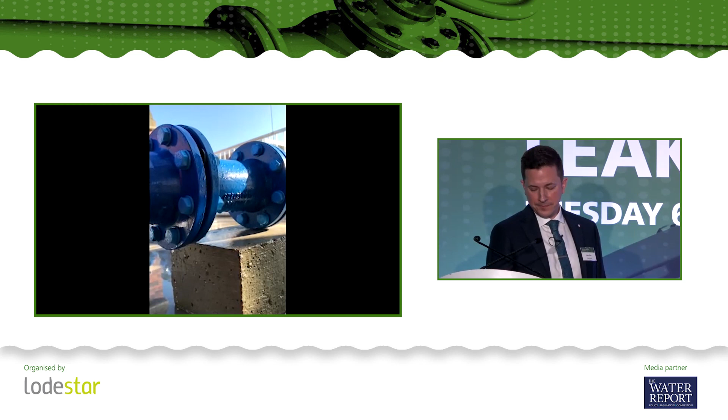Okay, there we have a collection of pinholes of different sizes. On the far right, we've got one that's 1.5 millimeters, and on the far left, we've got 4.5 millimeters. What we can see again is the carrier fluid, the fibres, curing those leaks. It does take a bit longer to cure the larger leak.

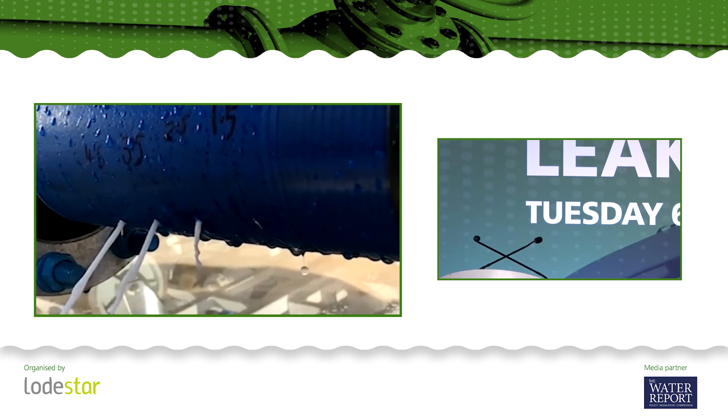I shall help myself in the meantime. What we can see there is the propulsion pig coming through behind on the 2.5mm hole, but because there's a little bit of mixing between those two parts, a fibre gets into place there and just cures it afterwards.

Brilliant. Here's a comm pipe or a supply pipe, and we can see a pinhole leak there. We can see the hydroseal curing that.

Fantastic. So a little bit about our journey. Our innovation journey is very similar to what Andrew presented earlier as part of the Wallingford Test Centre. We've taken a risk as Hydrosave - this is pre-OFWAT innovation funding, pre-spring, pre-Leakage Innovation Centre. Why have we done this? Well, as a business, and indeed as people, we're passionate about innovation. This is about spotting an area within the market that we think needs further development, and we thought our skills uniquely combined, and we could bring this to the UK.

Interestingly, on the innovation front, it was Hydrosave that introduced lift and shift noise logging in the early 2000s. We've just celebrated our 25th anniversary, and this was very much part of our LinkedIn update. We acquired the license in 2018 for the Curapipe license in the UK and Ireland.

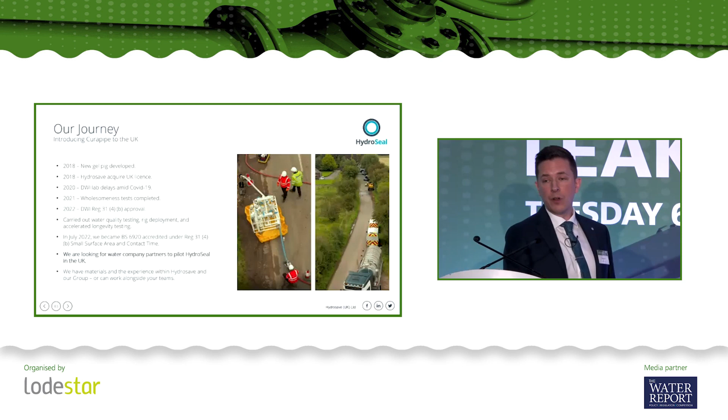So we're looking for partners to pilot it on real-world assets in the UK. We have the materials and experience within HydroSave and the wider group, and we can work alongside your teams as well. It's compliant to Reg 31(4)(b) and certified to BS 6920, and that's the active repair material.

Internationally, this isn't new. We've had 250 plus deployments worldwide. In Italy, that's had 100 pipe sections treated, so that's multiple pig trains. The specific case study of Brescia province - I hope I'm pronouncing that correctly for anyone who speaks Italian - we were looking for 0.25 MLD leakage on that section of pipe, and Curapipe found 100% of that. In Italy generally, they found about 92% of the leakage they were looking for.

South Africa, similar picture - 100% save, 0.2 MLD. We've also had an installation in Jerusalem Old City in Israel, where the technology's from, and that delivered 87% of the lost water they were looking for in that area, so 0.6 meg.

But there are challenges with this. We have to choose a DMA with high background leakage - not high burst frequency, high background leakage. We know there's a large amount of feasibility and planning involved in this. This isn't an R&M style solution. We need to ensure we're in the right area, and we've got the process lined up so it proceeds as planned. So there is a large amount of feasibility and planning.

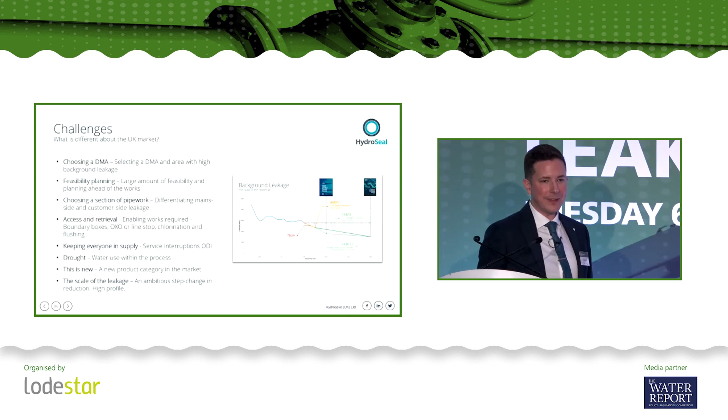One of the biggest challenges is this is new in the UK - it's a new product category in the market. I know there are a few of us in this space, but it's new, and we need to take that leap in real-world deployment. But what we do as a room has never been more important, and it's never been more high profile than it is now.

I'm not going to go through this process, but I was conscious that the materials are shared afterwards, so I thought I'd include it anyway.

Really, I wanted to conclude by saying we know when to use it, we know how to use it, we know the process for getting it in and out of the system. We know that water companies have synergies with, for example, metering programs, and more boundary boxes are going in, hence the enabling cost comes down. We have the experience ourselves within HydroSave and our group to make it happen. Alternatively, we can work with your teams to make it happen.

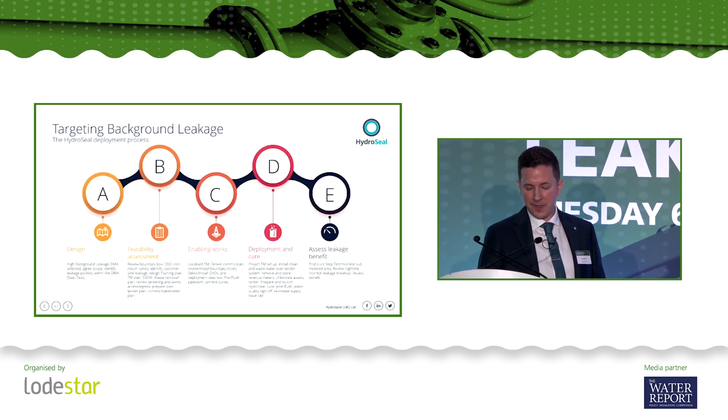But we are at alpha stage. We need your help, so we're looking for interested parties and partners to help us take it forward in the UK. We have begun talking to a number of water companies, including our existing leak detection clients.